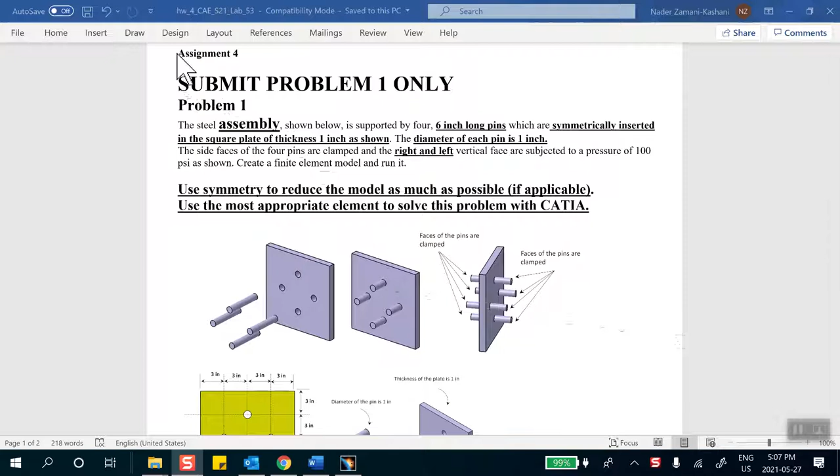Hello folks, this is the video tutorial for homework number 4, lab section 53. There are two problems here, and the difference between the homework for this lab section, which is 53, and lab section 54 is that here you have to submit problem 1. For lab 54, they're supposed to submit problem number 2. Okay, now, that being the case, for you guys, I will only do problem 1. And if you want to see how the other problem is done, then go to the video for lab section 54. Okay? All right. Very good.

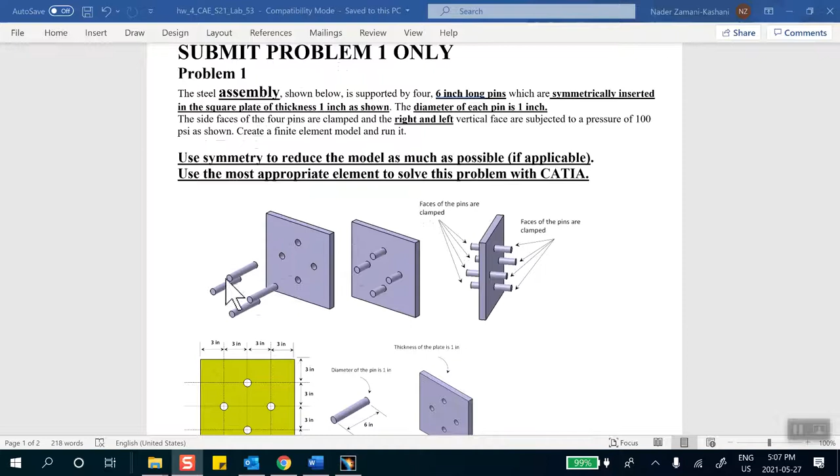So the problem is this. You have a part like that. It has to be done as an assembly. You have a part like that, and you have these pins which are inserted symmetrically into these holes, and then the ends of these pins are all clamped, and then on these faces you have a pressure applied. That being the case, you stare at it and come up with the conclusion that all you need to do is to model 1/4 of that. You model 1/4 of this and also make a cut through the depth of this. So basically, you're taking 1/8 of that model.

Now, you have to make a decision whether you want to make 1/8 of this model. It's up to you. And then go and create the problem, model the problem, or you want to model the whole thing and then start cutting it with the three planes that I was talking about. This way, vertically, and through the depth. That's entirely up to you.

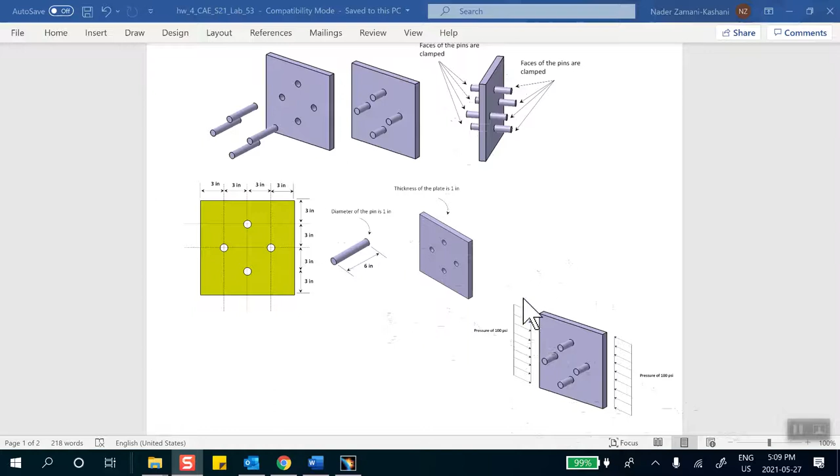So my approach, at least for this problem, is going to be I will make the whole model, except that I will not make these two pins, because when you cut it horizontally and vertically, and you discard these three pieces around it, these two pins are not going to even show up. So I'll make this entire geometry, this block with 4 holes, and I will make 2 pins, and I'm not going to make the other 2 pins because I'm going to start cutting it with symmetry planes. Okay, that's how I'm going to do that. It really doesn't matter. It's up to you how you want to approach your problem. Okay, now remember that this has to be done in assembly, and the most appropriate elements are solid elements.

Now, I don't anticipate it, but some of you may decide to try it. I don't advise that, because in all likelihood you will not succeed to finish the problem, and you lose a lot of marks. Somebody might try to use beams and shells for this problem. Although it is possible, I don't advise it at all. Okay, so let's go ahead.

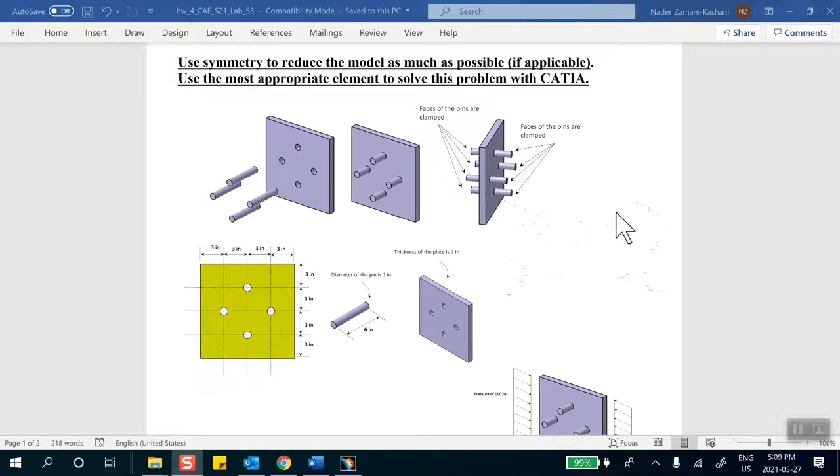If you start with a product file, immediately you're going to save it. File, save management, save as, desktop, new folder. This is homework 4, lab 53. And obviously it's going to be problem 1, but that's okay. I'm going to do that later. So product is right here in that folder. Your student ID number 1, 2, 3, 4, 5, 6, 7, 8, 9. Your last name, Euler.

This is homework 4, lab 53, and this is problem 1. As I said, problem 2 is not going to be done in this video, but it's going to be in the one with lab 54. So lab problem number 1. Okay, good. So that's our product.

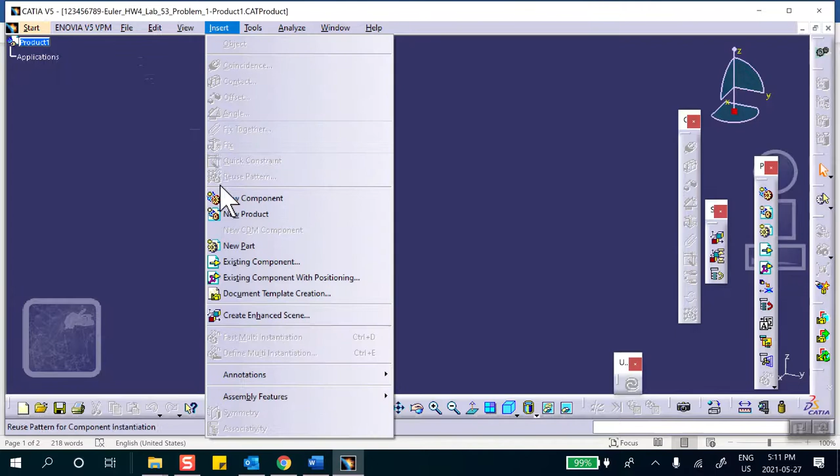And the first thing I'm going to do, I'm going to insert the block in it, that block with 4 holes. So insert a new part in there. And I'm going to call this thing, in the properties, block. Okay. Let's make the block. I double clicked on this line, which is part. You see, this is a part. Double click on this thing.

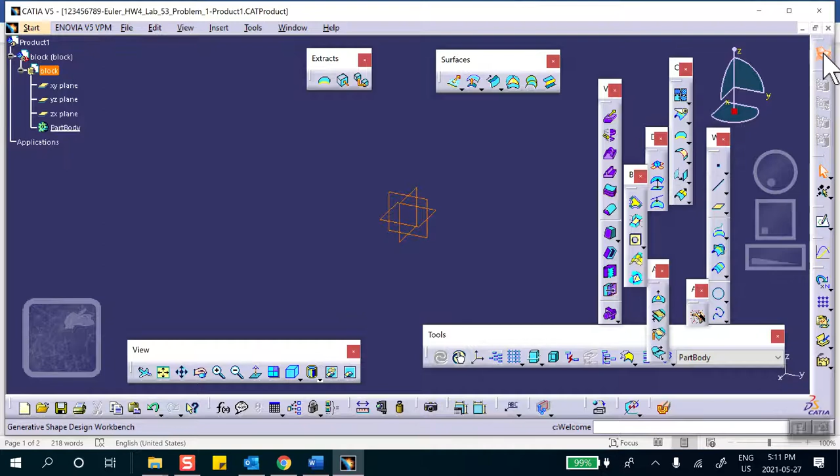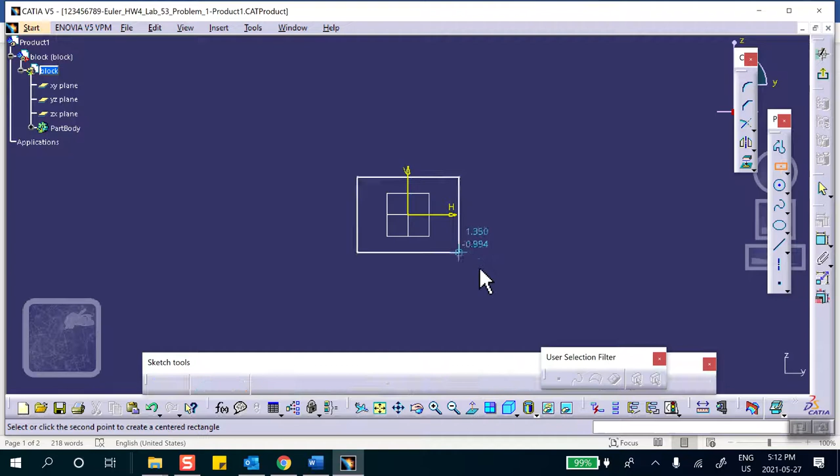It puts you in part design. Actually, you ended up in generative shape design because that was the last thing that I did. So I want to go to part design. See that? On a convenient plane, on that vertical plane, I will sketch that block with 4 holes. So let me start with a rectangle or a square centered here. Okay. And let's dimension this thing to match the dimensions that I have in the drawing. Now this is 6 inches. This is 6 inches. So is this one 6 inches?

And then I have to make 4 holes. Strictly speaking, you don't need 4 holes. You can make 2 of them because the other 2 are going to disappear anyways. But I'll make it exactly like it is. Okay, I'm just doing too much extra work. That's all. So let's put it there.

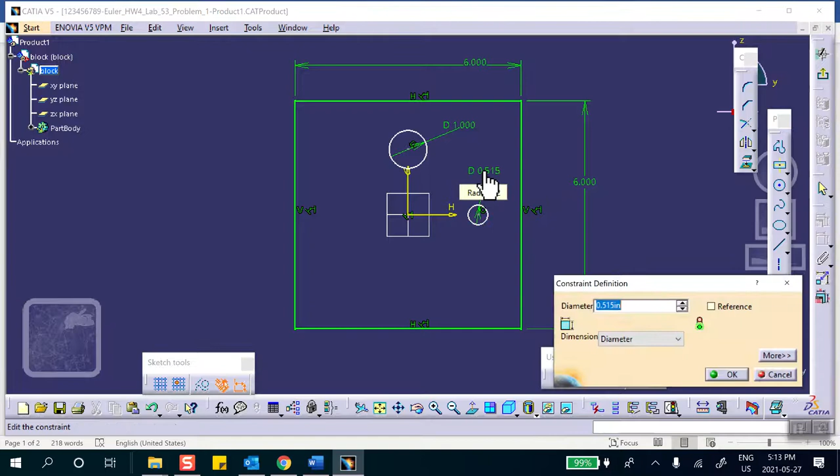Dimension these things. So this one, I think the diameter of these holes is 2. Okay, diameter is 2. I'm sorry, diameter is 1. Diameter is 1. And this one also, diameter of this one is also 1. Okay, now I'm too lazy to do the other holes, although they're not needed, but I'm going to mirror these. But let's first position it in the right spot.

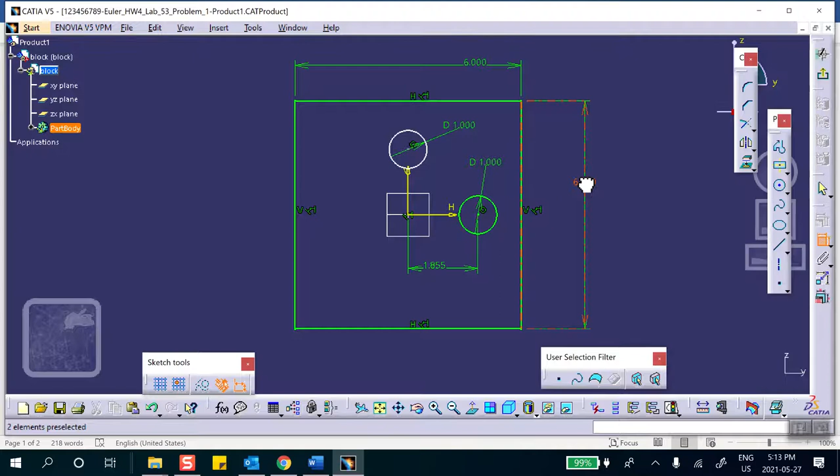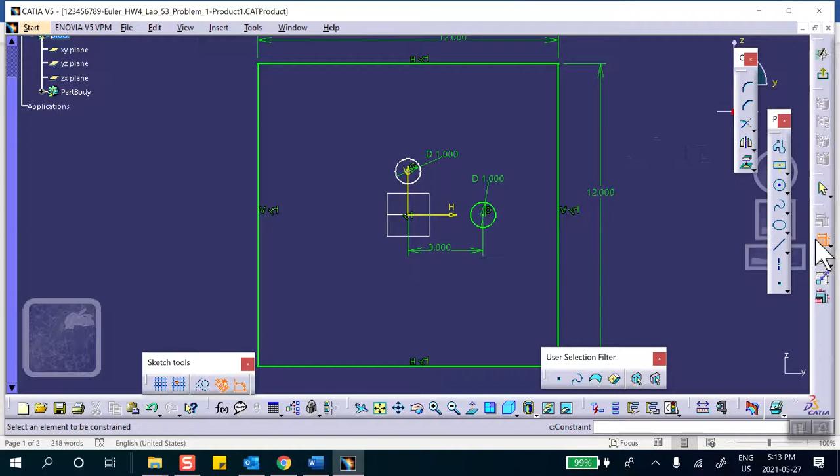So this distance to this distance, this is supposed to be, I think I made a mistake somewhere here. This has to be actually 12. Sorry, this is 12. I thought it was 6. Okay, that's all right. And this one is 12 also. Okay, now the distance from this point to this axis is 3. Okay, very good. And the distance from this center to that axis is also 3.

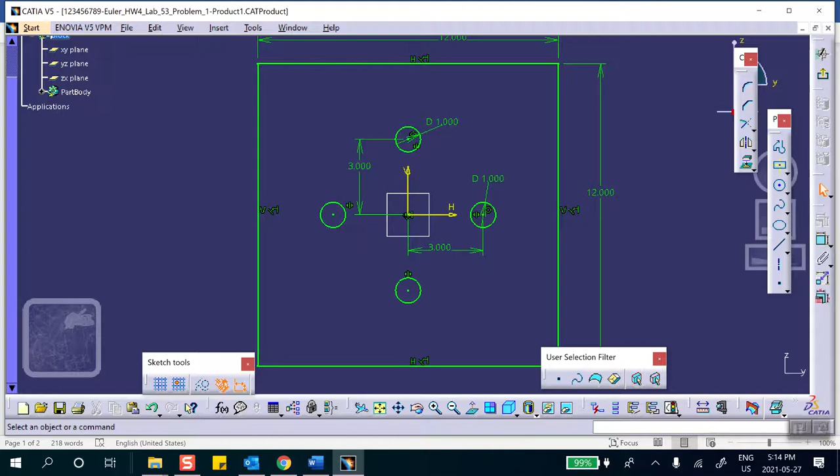And if I insist on making these holes, although I don't need it, you can always mirror it. For example, here's the mirror. Mirror this with respect to that, right there. And mirror this with respect to that. It's there. At the end, when you make these cuts, then these 2 other holes become redundant.

And now we're going to pad it. The thickness of this part, this block, is, it says 1 inch. So if you do a mirrored extent, you're going to go 0.5 in each direction. Okay, there we are. Now this entire assembly is made out of steel. So at the end, I'm going to declare the properties.

Okay, good. All right. So click on the floppy. Go all the way to top level assembly, and click on the floppy, and it's going to save the parts for you. Let's do the pins. I'm going to do 2 of the pins. So although the pins are identical, you can get away with making 1 and using copies of it or instances of it. I'll make it. It's too much of a hassle. You can get into trouble.

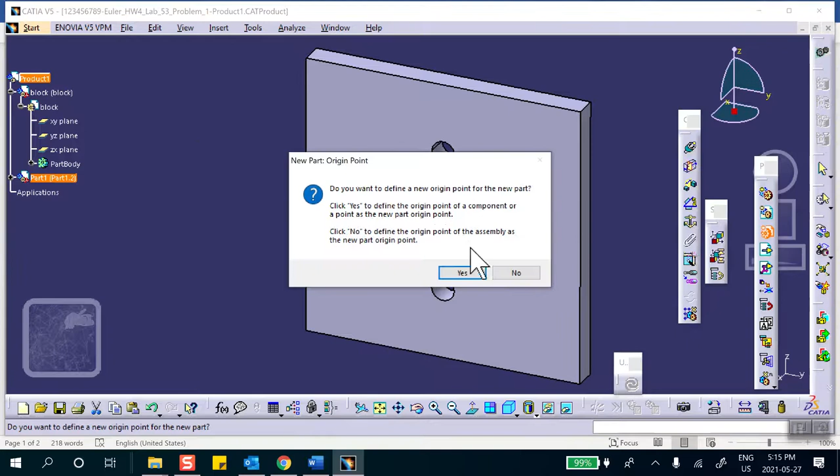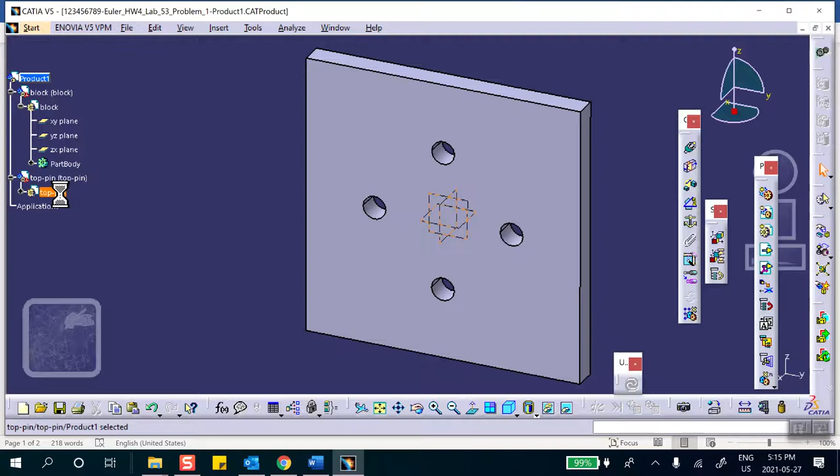So insert a new part in there. You know, this is going to be top pin. How about that? Right click properties, top pin. Top pin. And the part name is top pin. Top pin, just make it. Double click on the top pin. On a convenient plane, on that vertical plane, I will sketch. I'm doing a top pin, right?

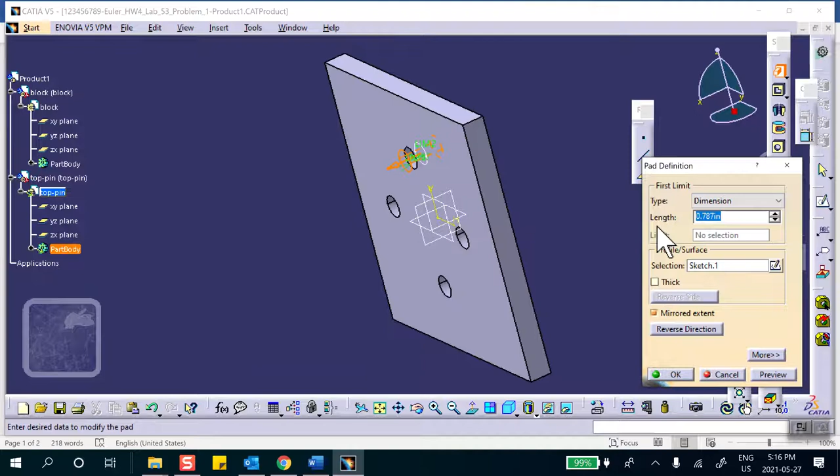So I'm going to project that circle. That circle I'm going to project right there. Exit, and then pad it. Mirrored extent. Now the length of each of those pins is 6 inches, so I'll do 3 inches in each direction. Mirrored extent, that'll make it 6 inches. There we are. This is the first pin. Let's go all the way to the top. Insert a new part.

Right pin. This is terrible the way I'm doing it because you can actually do a copy and paste and it's going to work. So copy paste of this part, this last top pin part. But I'll do it the long way. So it's going to be right pin, and right pin. Okay. Make it.

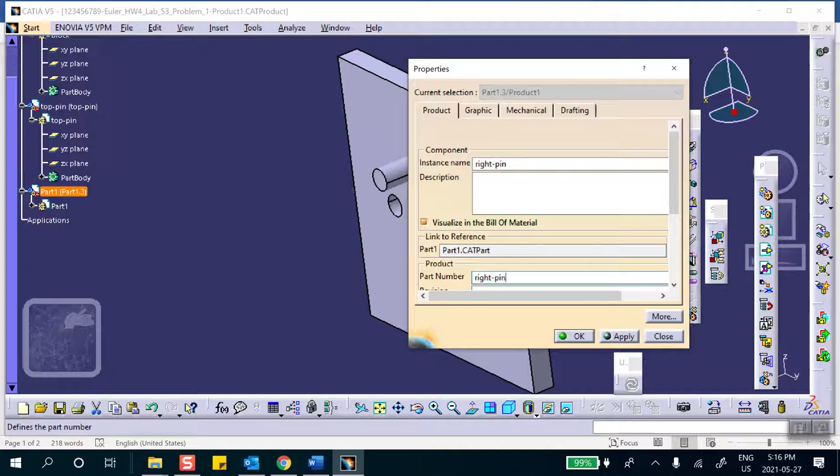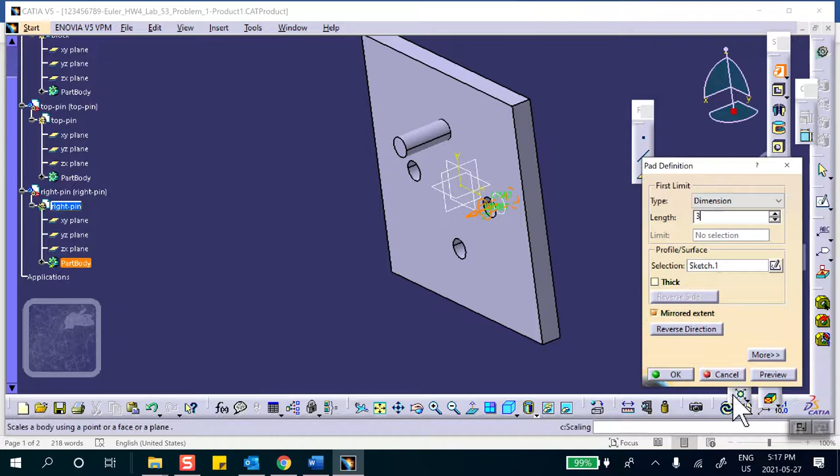Double click on it. On that same plane, vertical plane, I will sketch, project that circle. There we are. Exit, pad it, mirror extent, 3 inches in each direction, and there we are. Yep. Okay, now we're going to make everything out of steel. I think the property is steel, if I'm not mistaken. It says the steel, yeah, steel assembly. Metal, steel, and if you put it on the top level assembly, all these parts are going to have the same properties.

Now, before I go any further, notice that the reason I didn't make these two is because when I cut it to take 1/4 of it, this will not count, this will not count, etc. That's why I didn't bother making it. But if it's confusing, you go ahead and do that. Now here in the assembly, you have a split. You have a saw. Let me get the saw here. Where is the saw in the assembly? Let me get these things out. Right there. You see this?

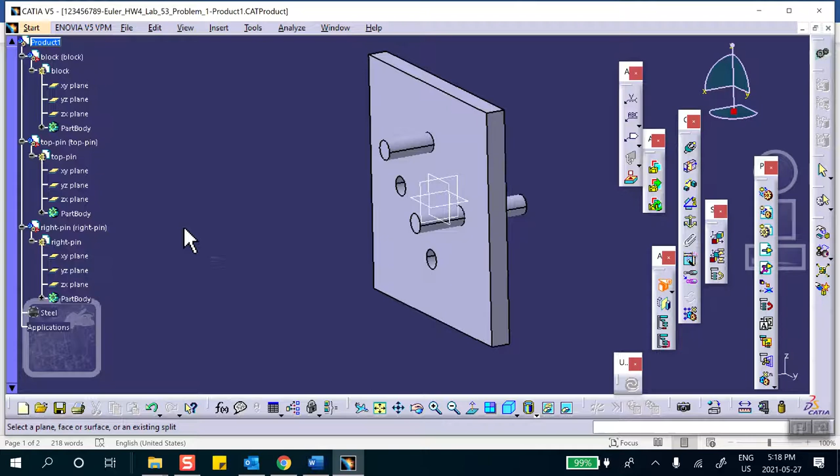Right there. Now, the bottom left corner, it says select a face or a plane or an existing split. So I'm going to select this middle. It says, look, when you cut this object with this middle plane, these parts are all going to get affected. Are you sure you want them? And the answer is yes. And which one do you want? I want all of them.

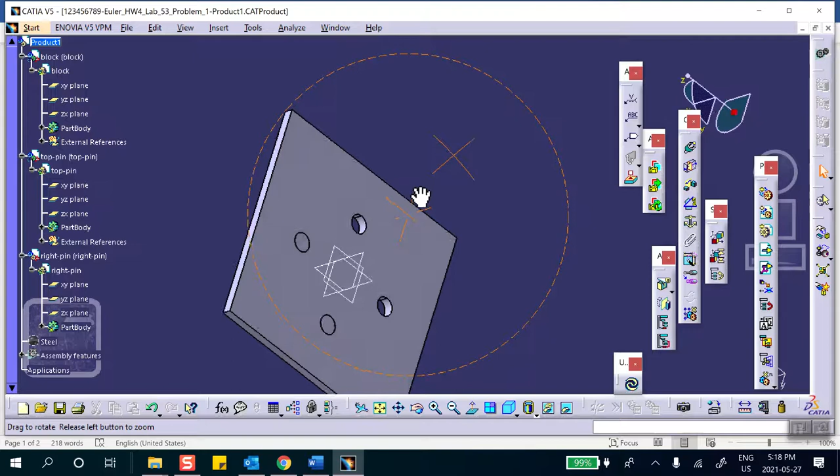And the plane is taken, and there we are. Notice that it cut it. And it told me that, look, some of these are going to get affected. Are you sure you want? Now, let's do another one.

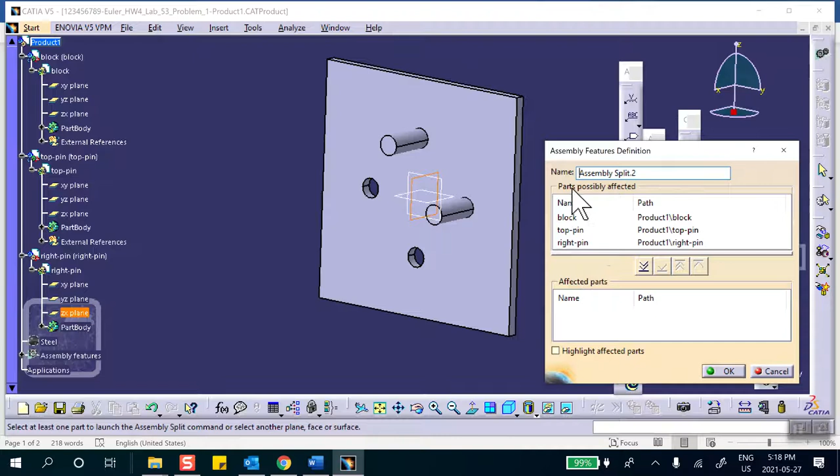Another one. This time we're going to cut it with this plane. And it tells you that some stuff are going to be, let's see now. It says parts possibly affected. So I want the block to be cut for sure. I want the top pin to be cut for sure. The bottom pin, I don't want it to be cut because that plane that I picked is not going to be affecting this. So we say okay, notice that this is fine.

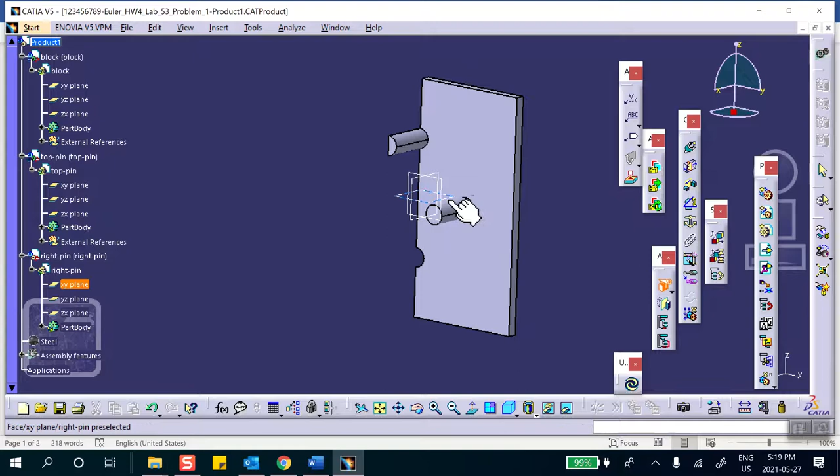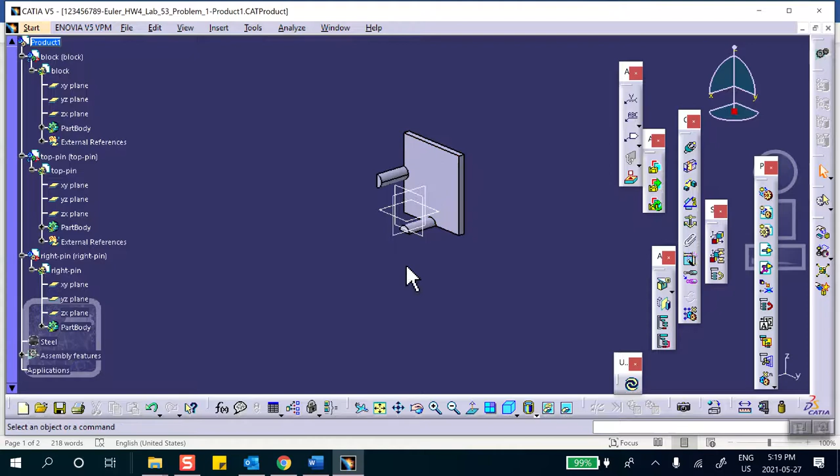Do another split, and select this horizontal plane. And it says, okay, these are possibly affected. I want the block to be cut, and I want the bottom pin, right pin to be cut. The top one is not going to be affected anyways. So we say okay, and there we are. So the bottom line is that you need to have created something like this, made of 3 parts, this and 2 pins. If you want to do it like that to begin with, be my guest, no problem.

The other thing is that notice that I didn't put any constraints between these parts. The reason I didn't do it is I don't anticipate to move these apart. But if you ever have to move these apart, you better put some kind of a constraint between that pin and this block. So I did not put a constraint, but if there's any chance that you have to move these for whatever reason, you better put a constraint because otherwise they will not go back to the original position. They are in the correct position because of the way I made it. I'll leave it to you to worry about constraints.

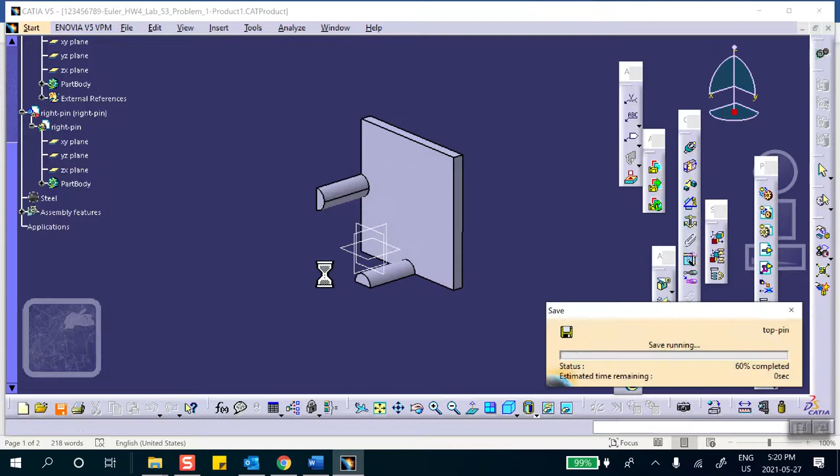So this is all done. So let's save everything. Okay, good. Now we're done here. We're going to go to the generative structural analysis. CATIA sees 3 parts. Immediately, it's going to mesh all of them. And the size of these meshes depends on the size of the part. If you want to make changes, you can do that. There are 3 elements constructed here. One is for the block, the other one for the pin, and the pin.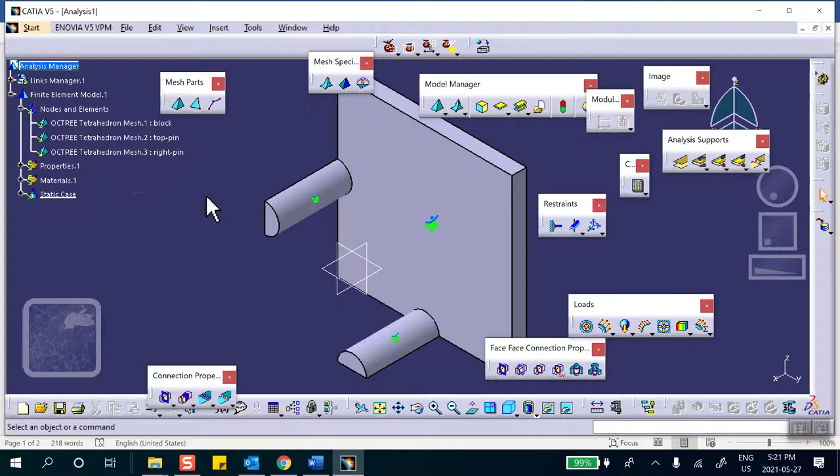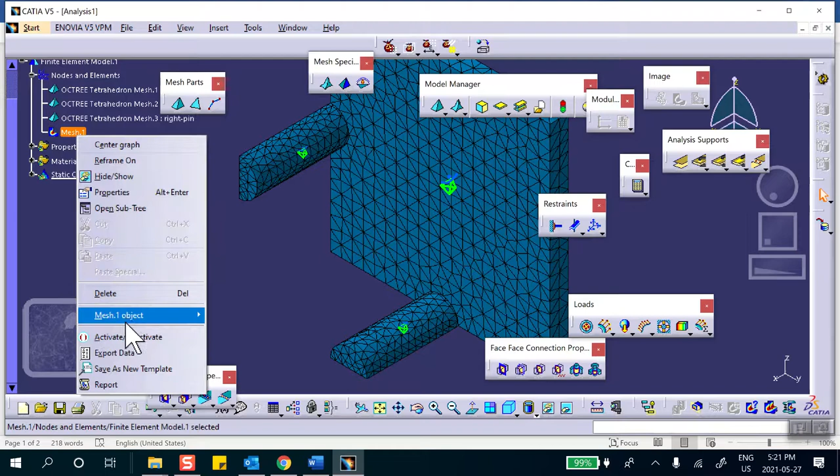Let me make the block element a little bit smaller, maybe 0.3. Okay, very good. Now, notice that the properties are automatic generated for 3D. And if you want to look at the mesh, put the cursor there, right-click, mesh visualization. In the event you're asked to make a finer mesh around these holes, you can do that. Just watch the videos for the other 2 labs. Look at the one for lab 52, I'm making refinement around a certain hole. This doesn't ask for it, but fine. Now deactivate the plot. Let's move on with the rest of the problem.

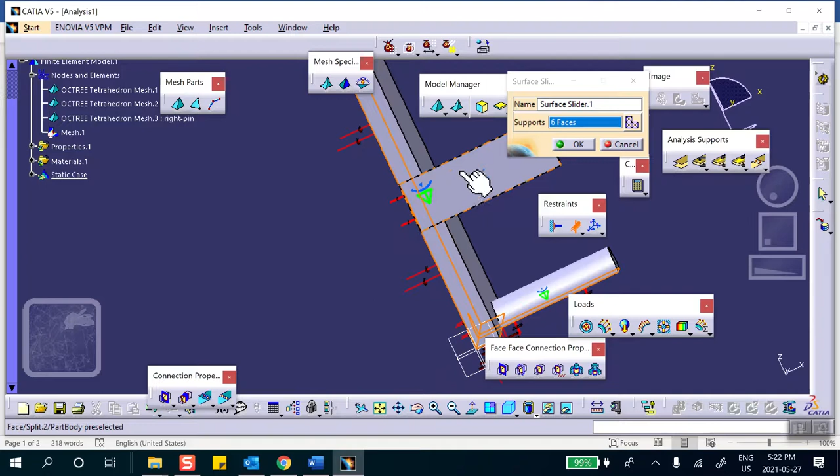First of all, surface slider. This is a plane of symmetry. This is a plane of symmetry. So is that, and so is the back face, and so is this little circle of the pin, and that little circle of the pin, and turn it around. This rectangle, and that rectangle, and that rectangle. All the stuff that I created by making that cut, including these little semicircles, you have to put surface slider on it.

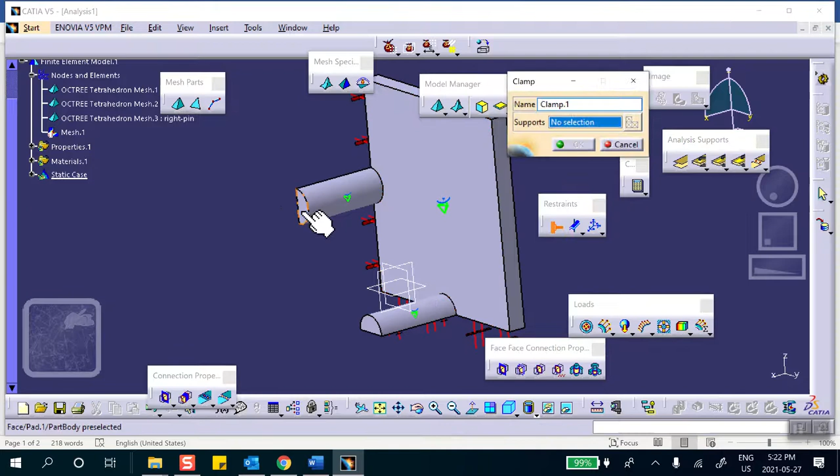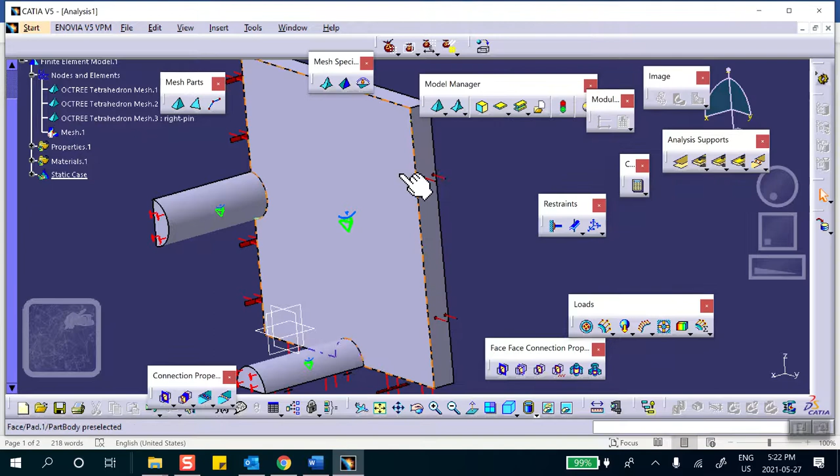Now, the next thing to do is to clamp these ends. You're told that these are clamped. So this is clamped, and this is clamped, and we say okay. And this end is subjected to a pressure. Pressure right there. I'm going to apply pressure here. What's the value of the pressure in this particular problem? It says 100 psi. Very good. In the right direction. It looks like we are almost done. Not quite. You will see that this will bomb out. But let me save it first.

File, save management. This analysis we haven't saved. Save as. What was the folder name? Homework 4 Lab 53. Let's go to the desktop. Homework 4 Lab 53 right there. And I'll give it a meaningful name. Your ID number 123456789 dash Euler dash. Now what did I call that part? I called it homework 4 Lab 53. I think I called it also problem 1. Is that right? Problem 1. Yep. And the analysis is analysis 1.

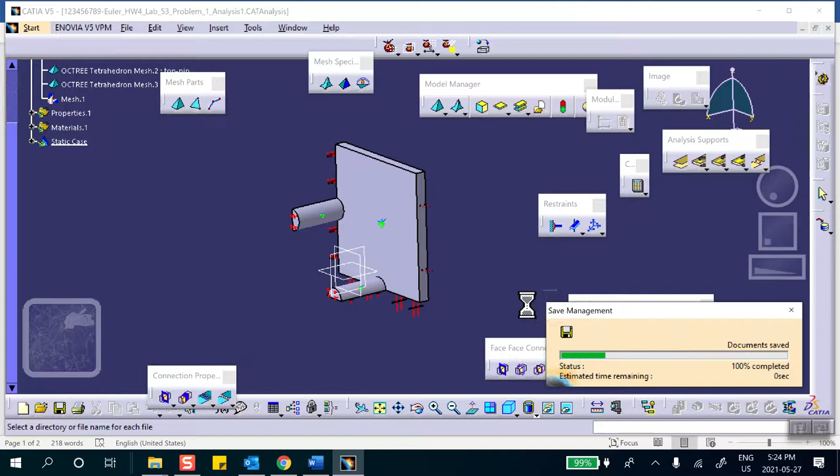So good. Say okay. Now, I'm going to run this thing to convince you that this will not run. And we'll discuss the issue of why it's not going to run. Don't worry about that warning message.

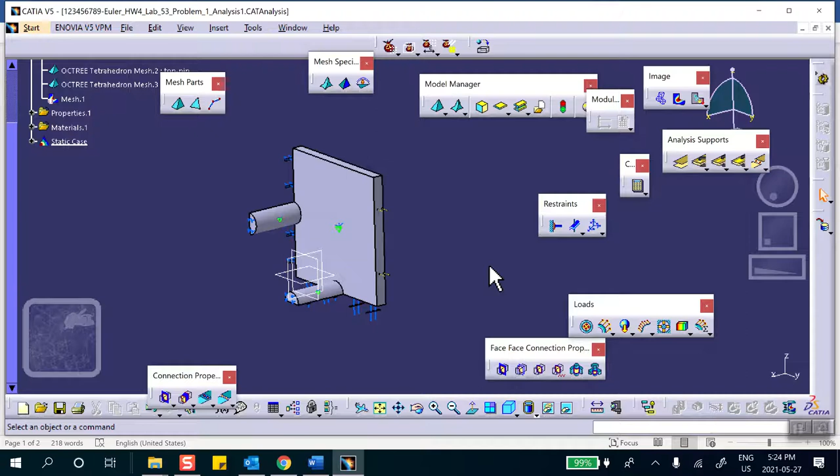Oh, okay. It ran, but it is wrong. You'll see why. If I look at the displacement, let's change it to average ISO. It did run, but it's wrong. And make this thing material shading. You'll notice that this piece, the block, is getting compressed.

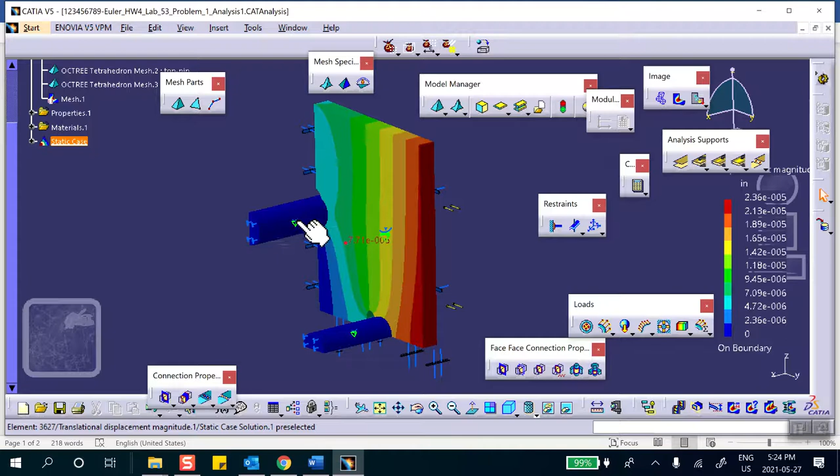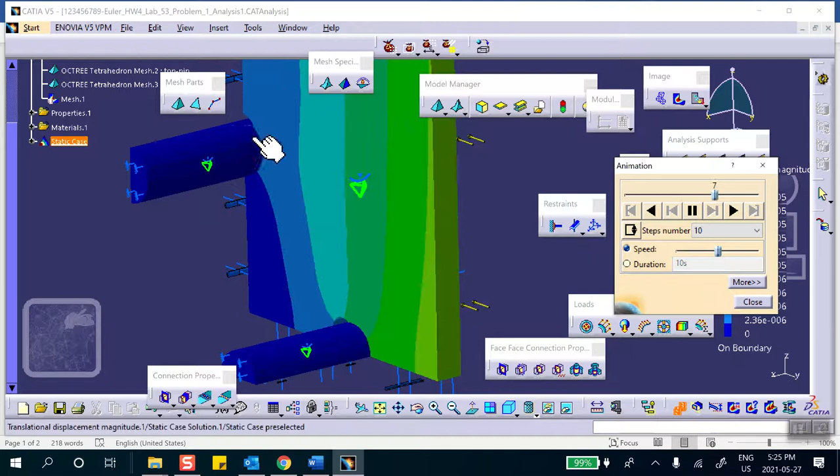That's not surprising. However, this pin, because it does not see that block, and the same thing here, they don't move at all. In fact, the block goes through the pin. You can see that, goes through the pin. If I animate it, you can see this. You see? The block is going through the pin. If I put it in a different view, you can see it better. Right there, you see that? That's because with assemblies, you have to create the interaction between them.

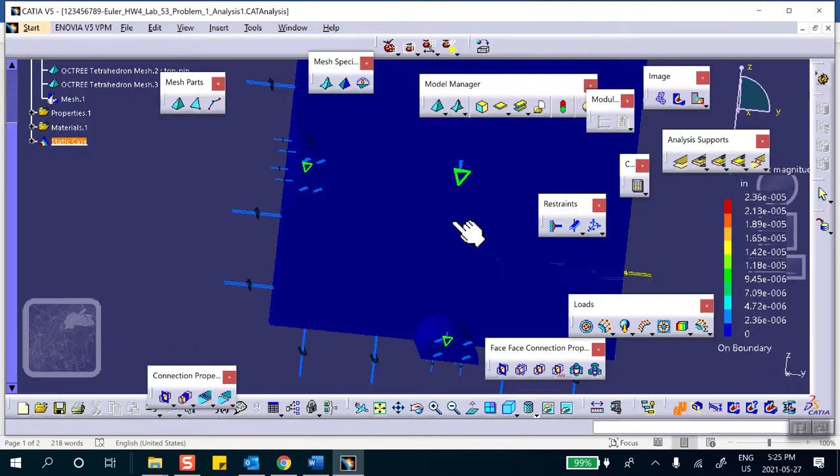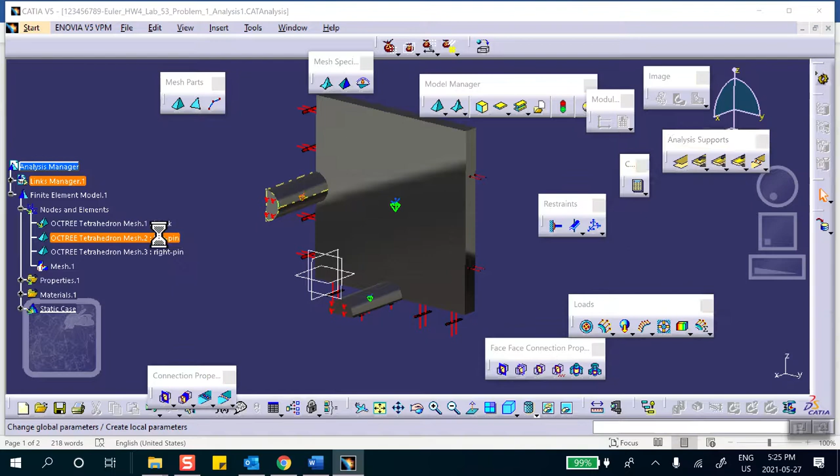So let me stop this thing. Okay, by the way, one of the reasons this is so slow, it looks like I have a problem rotating it, things like that. It could be because these are parabolic elements. Let me go change it to linear so it runs faster. Linear, less accurate, but it will run faster. Okay, good. Let me run it again. Again, it will run, except that the block goes through the pin, just like before.

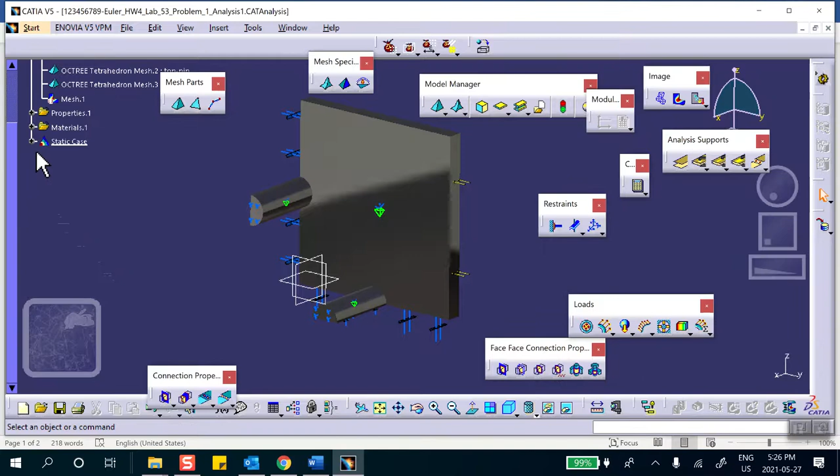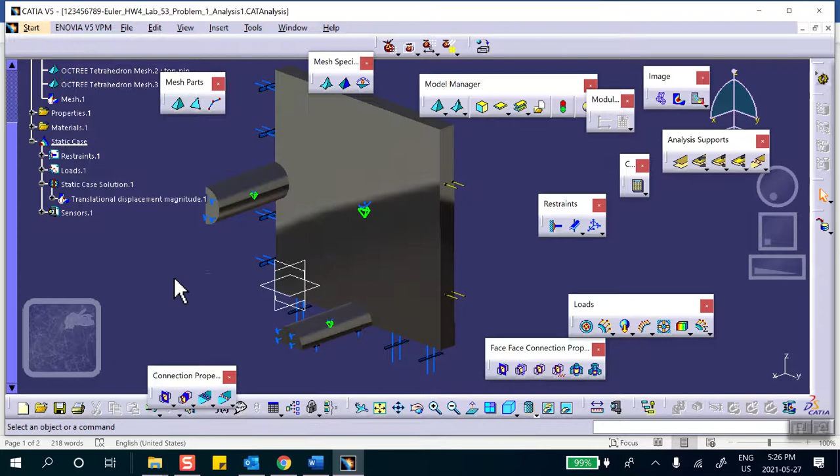Okay, here is your deformation, translation. Good. If you animate it, you see that it runs a lot faster. That's because the element is less sophisticated, and I can do rotations and things like that a lot easier than when I have a parabolic one. Okay, good. So deactivate this. Now, we need to say that there is an interaction between the surface of this pin and the hole, and the surface of this pin and the hole. And that interaction is in the form of contact.

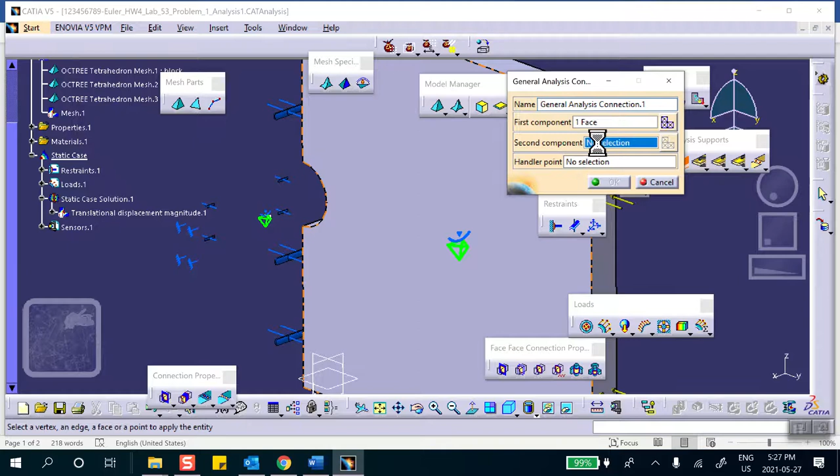Okay, so let me change the rendering here first of all. So where's the analysis connection? Analysis support right there. The first one is general analysis connection. For the first component, I'm going to select the surface of that pin, and then I'm going to hide it. And for the second component, I'll turn this thing around and take the surface of the hole. It creates this thingy here, which represents the connection that you created. Don't worry about the way this thing looks, but it did create the connection right there. You can see that when I select this thing, that thing lights up.

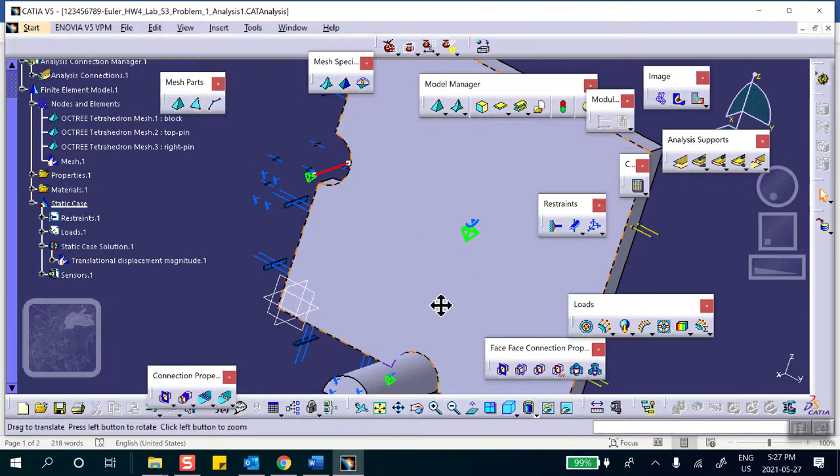Okay. Now, do another one for the bottom. So another connection. It's a good idea to give these connections meaningful names. For example, top pin, right pin, etc. I didn't do that. For the second component, hide this guy and select the bottom here. Okay. So we created two connections here, and we're going to declare both of them to be contact. Look at the face-to-face connection. Just because you create a connection doesn't mean the problem is done. You have to say what kind of a connection. Is it fastened? Is it contact, etc.

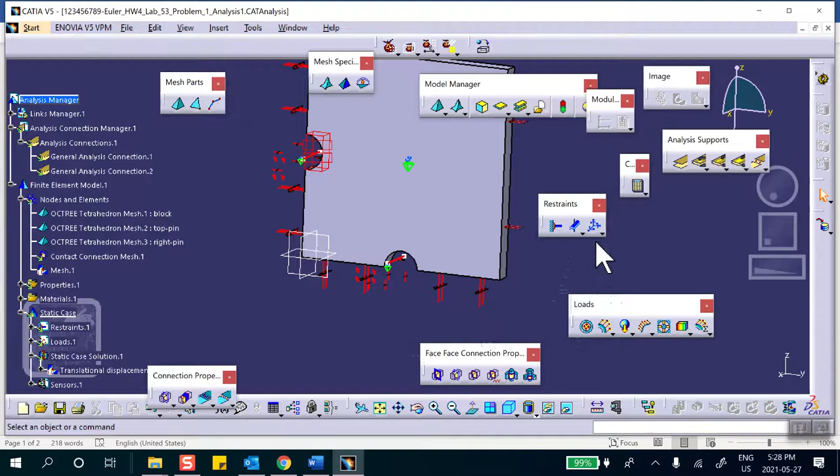So it's a contact for this problem. So I'm going to select this to be contact. Don't worry about these things. Do not fool around with them at this point in your course. But if you have any questions, please feel free to ask me. Another contact right there for the second one. See that? It looks like two things are contacting each other.

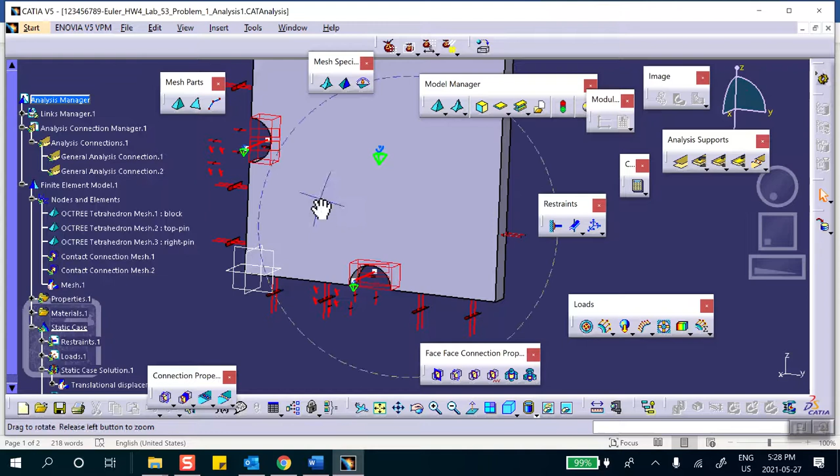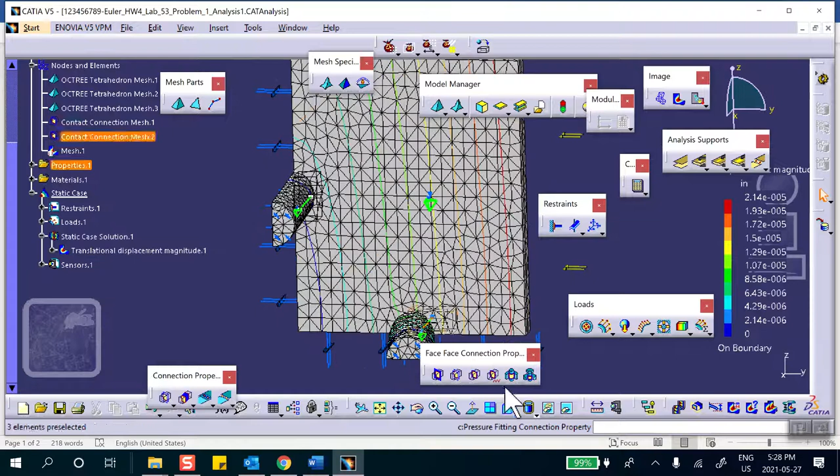Okay, so save it, and now run it. You see that the pins will actually interact with that block. It'll stop the block, which was missing in the previous case. Good. So let's look at the deformation. You see this? Let's change the rendering and animate it. Let me get closer. You see? The block will not cut like butter through that pin. It just pushes the pin. The same thing down here. See, it's just pushing the pin.

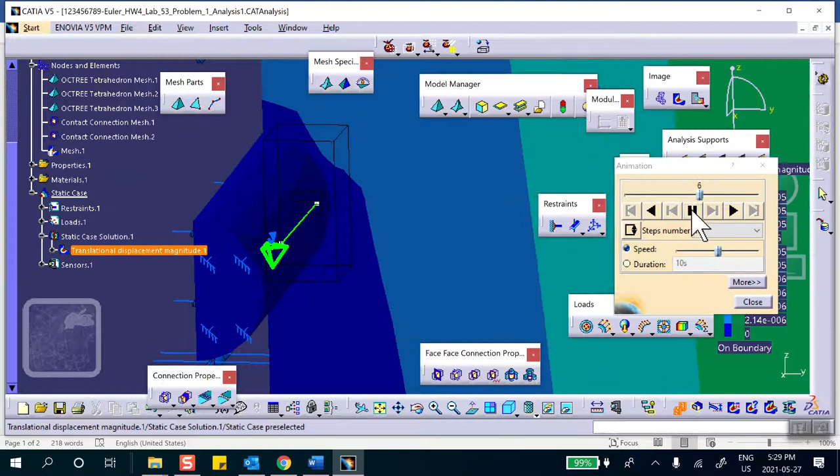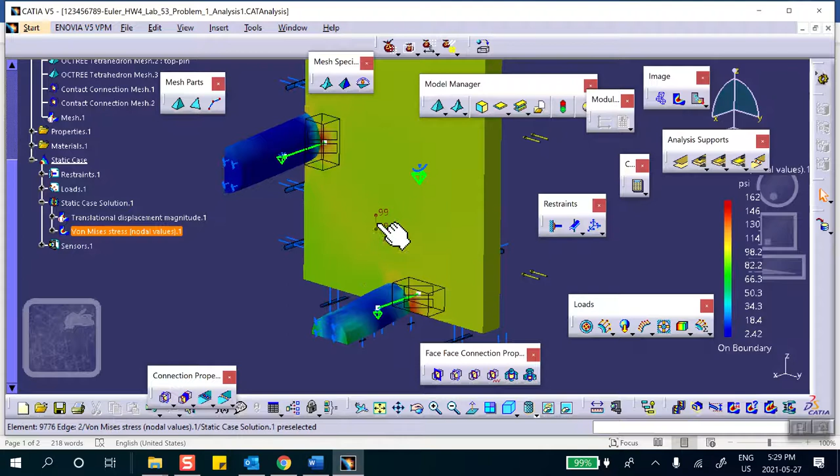Okay? And you can look at the von Mises stress if you want. Okay, so you can see that this is very little stress here. And when you think about it, this was a 1-inch thick piece of steel. 100 psi on that cross section is not really much of a force. So very little stress is going to be developed in the problem. Okay, excellent. So that is this.